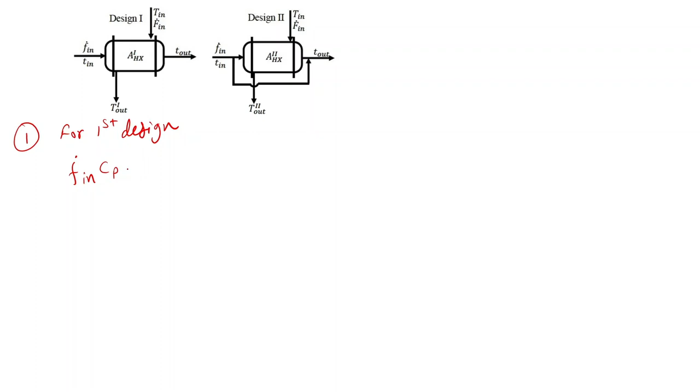So let's solve it. For design 1, let's write the energy balance. For the first design, we can write the energy balance as mCp delta T, where M is the mass flow rate, F dot in, and heat capacity as Cp. Let us consider this as tube side and this one as shell side. Corresponding to that, we can write this for the tube side fluid as Cpt, and the temperature difference is T out minus T in.

Similarly, for the shell side fluid, I can write it with T out given as 1. Now let's write this for the second design. Here the flow rate and the other parameters for both heat exchanger designs were given as constants, so I will just replace them as the same. The inlet and outlet temperatures T in and T out are same as the previous one. But in this case, the T out we have been given as T out 2, whereas in the earlier case it was T out 1.

So we have been given that all of these parameters are same in the first and second design. So all of this can be cancelled out, and we can see that these terms are the only different ones, so they must be equal. That is, we can write T1 out is equal to T2 out. Now from the given options, we have option B and option D, in which T1 out is equal to T2 out. Now we need to compare the area of the heat exchanger for both of these cases.

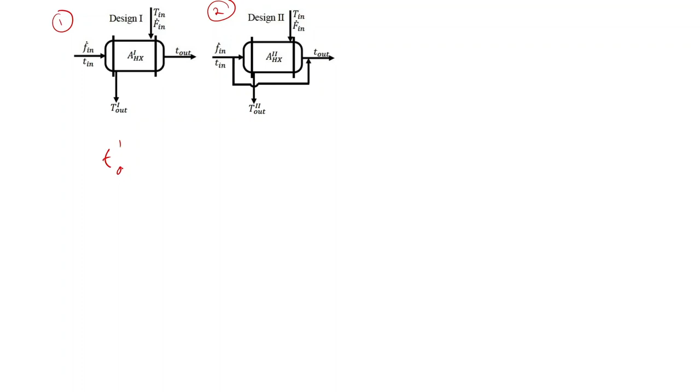So from that we can write that T1 out will be greater than T2 out. Ideally this should have been the case, that T1 out should have been greater than T2 out, but from the diagram we can see that both the temperatures are same.

So for design 2, we need to produce this higher T out. To produce higher T out, we need to increase the area of heat exchange. If the area of heat exchange is higher, then this T output will be higher, and that will ultimately be compensated by mixing it with this inlet stream.

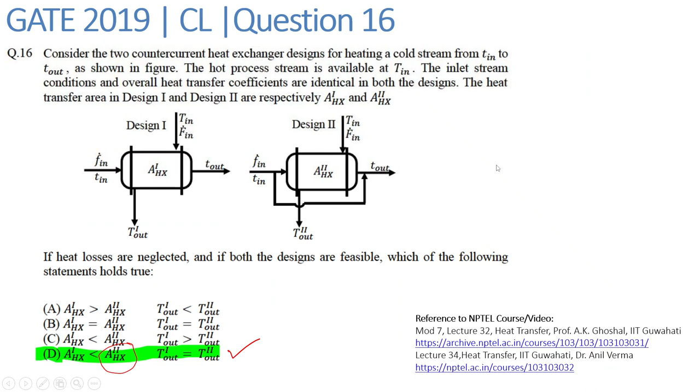So let's move on to the second question. This is question number 42 from GATE 2019 chemical engineering paper, from the subject of heat transfer.

In this question: a solid sphere of radius 1 centimeter and initial temperature of 25 degrees Celsius is exposed to a gas stream at 100 degrees Celsius. For the solid sphere, the density is 10 raised to 4 kg per meter cube and the specific heat is 500 joule per kg Kelvin. The density of gas is 0.6 kg per meter cube and its specific heat capacity is 10 raised to 3 joule per kg Kelvin. The solid sphere is approximated as a lumped system and all specific heats are constant. If the heat transfer coefficient between the solid and gas is 50 watt per meter square, the time in seconds needed for the sphere to reach 95 degrees Celsius is to be found.

This is from the topic of unsteady state heat transfer, which involves conduction within the solid sphere and convection outside the solid sphere, in this case due to the gas stream. This concept is found in lumped heat capacity analysis. So let's look at the video solution.

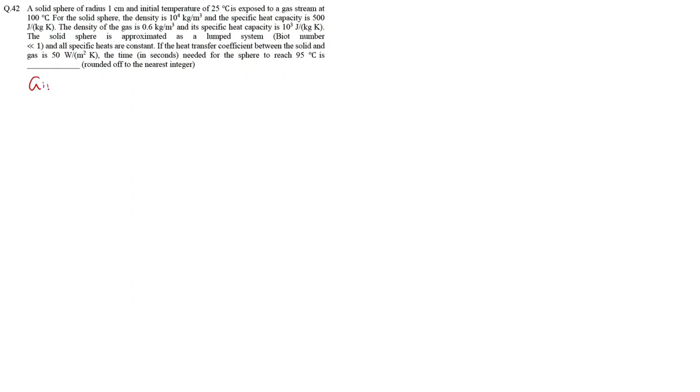Okay, so let's just write what all things we have been given. The radius of the sphere is 1 centimeter. The initial temperature, we will call it T0, is given as 25 degrees Celsius, and it is exposed to a gas stream at 100 degrees Celsius. So let's just call the ambient air as T infinity, which is 100 degrees Celsius.

For the solid sphere, the density is 10 raised to 4 kg per meter cube. Let's call it density of solid as rho s, equal to 10 raised to 4, and the specific heat capacity as 500. Similarly, the density of gas, let's call it density of fluid, as 0.6 kg per meter cube, and specific heat of fluid as 10 raised to 3 joule per kg Kelvin.

Now Biot number is very less than 1, so this implies that lumped heat capacity is applicable. The specific heats are constant, and the heat transfer coefficient H we have been given as 50 watt per meter square Kelvin, and at temperature equal to 95 degrees Celsius, time we have to find. So all these parameters have been given.

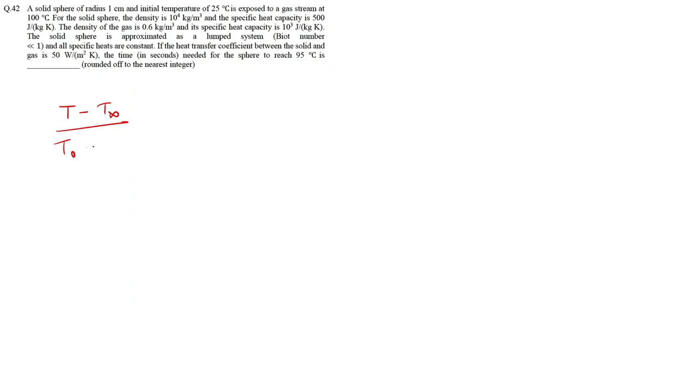Now let's just put this value here, and we will get t minus t infinity upon t naught minus t infinity is equal to exponential of minus 3 into 10 raised to minus 3 into t.

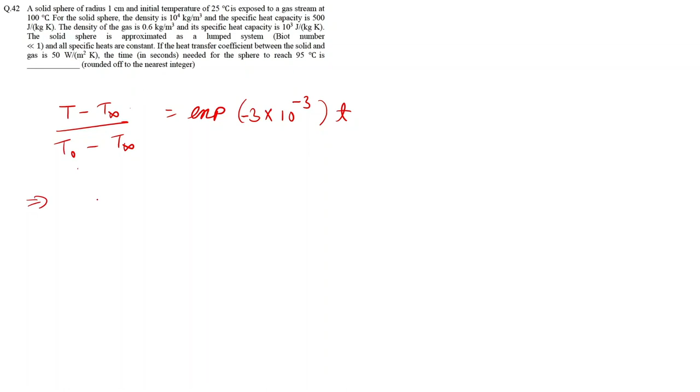Now let's just replace the value of t naught and t infinity. We have to find the time taken by the sphere to reach the temperature of 95 degrees Celsius, so this will be 95. So let's replace it: 95 minus T infinity, which was 100, upon T naught, the initial temperature, that is 25, minus 100. So this will be equal to exponential of minus of 3 into 10 raised to minus 3 into T.

So this we can write it as 5 on 75 is equal to exponential of... we can take log on both the sides, and that will give us ln of 1 by 15 is equal to minus of 3 into 10 raised to minus 3 into t.

So we can solve this equation, and we can get it as minus 2.708 is equal to minus of 3 into 10 raised to minus 3 into t, and that will give us time as 902.67 seconds. So yes, the time taken by the sphere to reach temperature of 95 degrees Celsius will be 902 seconds.

So yes, the final answer is 902.67 seconds, and since we have to round up till the nearest integer, we can round it as 903 seconds as the final answer.

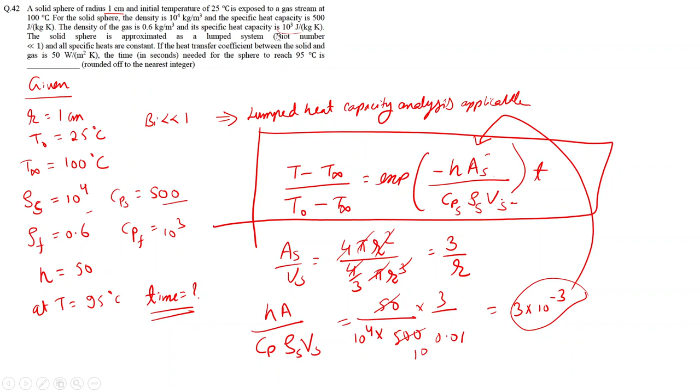And this formula will only be applicable if the Biot number is very less than 1. So if this condition is not given, then this formula shouldn't be applicable. That is, lumped heat capacity won't be applicable if Biot number is not very less than 1.

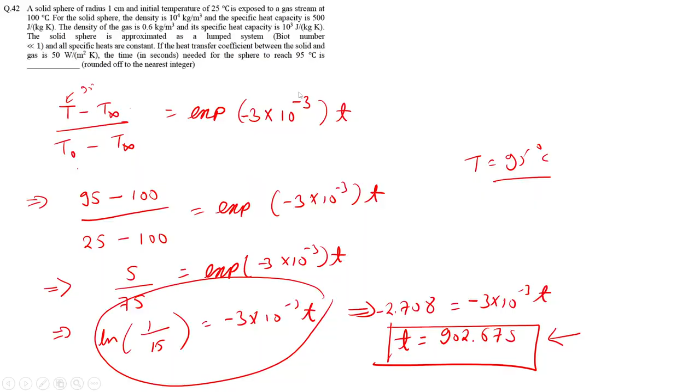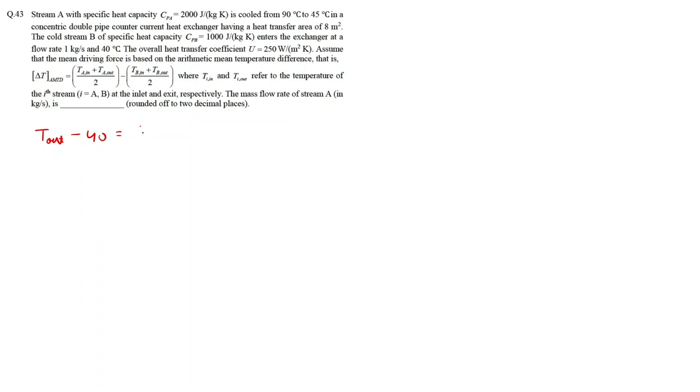So we can solve this and we will get T out minus 40 is equal to 2 into 67.5 minus 40 plus T out, right?

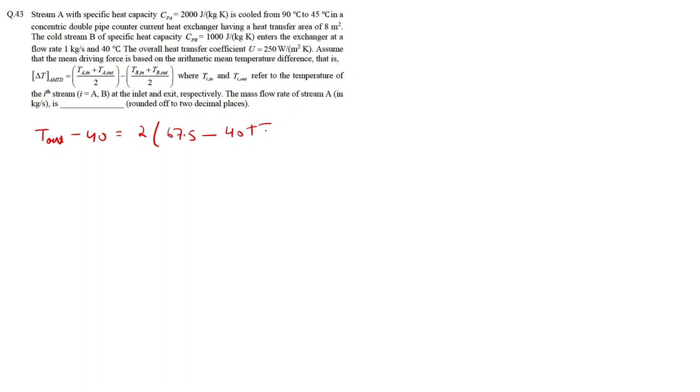T out will be equal to 40 plus 2 into 67.5 which was 135, minus of 40 minus of T out. This term will get cancelled and it will come to 2 T out is equal to 135. So this T out will become 67.5 degrees Celsius.

So from here we can replace the values. So that is mass flow rate was 1 into 1000 into T out minus 40. M dot C we have to find, CPC for the cold fluid, CPC is given as 2000, into temperature is changing from 90 to 45.

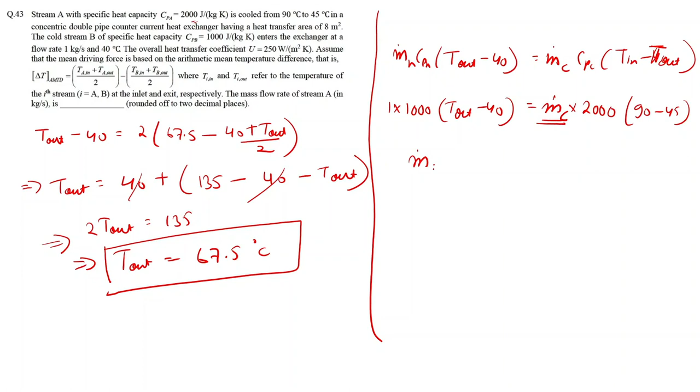M dot A will become 1000 into 67.5 minus 40 upon 2000 into 45. So yes, we can solve this and the final answer will become 0.3055 kg per second.

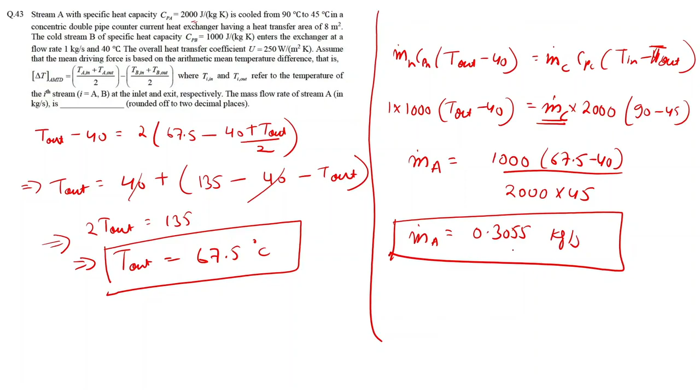So yes, the mass flow rate of stream A is given by 0.3055 kg per second. And we have been asked to round up till 2 decimal places, so we can report the final answer as 0.31 kg per second.

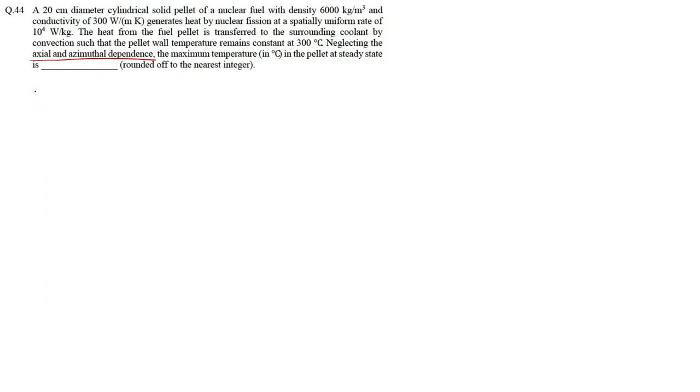That means that in the energy balance equation that we write for the cylinder, all the terms corresponding to z and phi will be equal to 0. So we can write the energy balance across the cylinder.

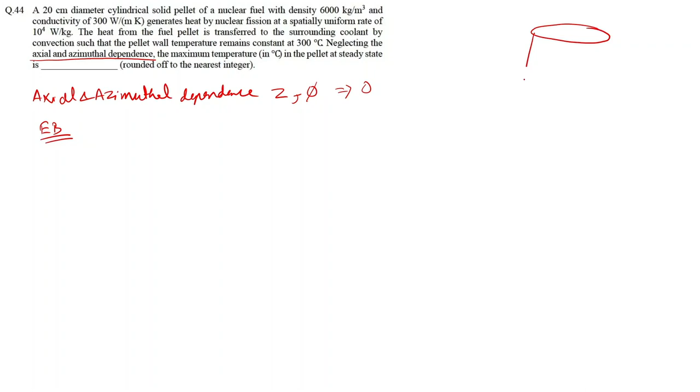So let's just consider this cylinder. This is my center, and we have been given r over here. So this is at r equal to 0, and this is r equal to R. This is my z.

So we can write the energy balance equation as 1 by r, d by dr of r, dT by dr, plus we also have this heat generation term, that is q dot, is equal to 0. So this energy balance we have to use to find the maximum temperature in the pellet.

But since we are given steady state, del T by del t we are considering as 0. And here, what all things have we been given? The diameter is 20 centimeter, that implies R is 0.1 meter.

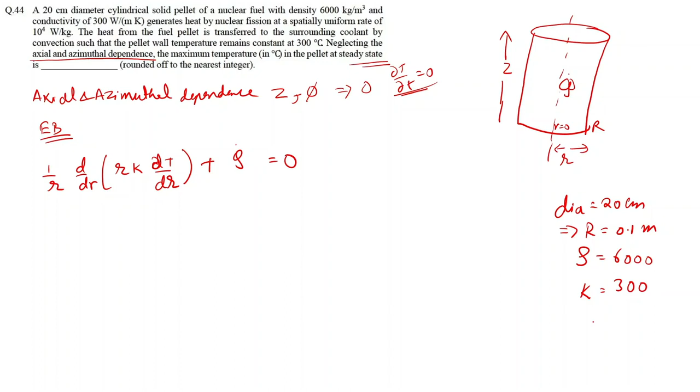Density we have been given as 6000. Conductivity K is 300. Now q dot we have been given as 10 raised to 4 watt per kg. And the pellet wall temperature we have been given as 300 degrees Celsius. And we have to find T max.

So let's just solve this equation to find the temperature profile. And once we have the temperature profile, then we can differentiate it with respect to r and equate that equation to 0 to find the maximum temperature.

We can simplify this and write it as d by dr of r k dT/dr plus q dot into r is equal to 0. Now we can integrate this equation with respect to r once, and it will give us r k dT/dr plus q dot, where the integration of r will be r square by 2. This will be equal to c1.

Now let's just find the value of c1. So that is, at r equal to 0, that is at the center, we can put the value of r equal to 0. So this will become 0 plus q dot into 0 is equal to c1. So that implies c1 will be equal to 0.

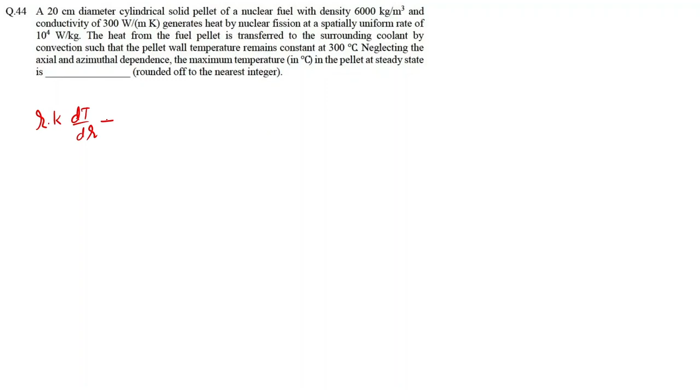So yes, we can write this as r k dT/dr plus q dot r square by 2 is equal to c1, and c1 was 0. Now we can again simplify this, and this r will get cancelled out, that is dT/dr is equal to minus of q dot r upon 2k.

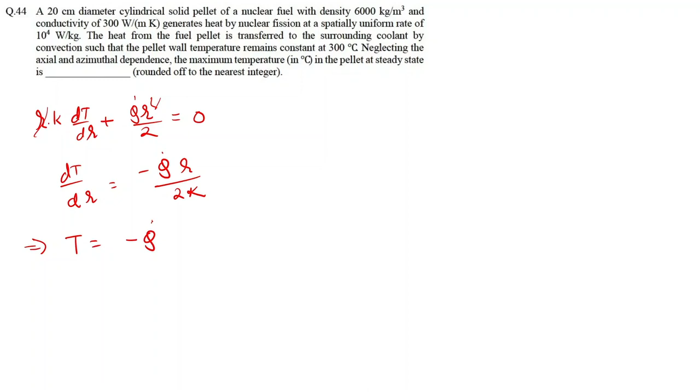We can again integrate this equation with respect to r to find the temperature variation across radius. So that will give us T is equal to minus of q dot into r square on 4k plus c2. Now we can use another boundary condition, that is at r equal to capital R, that is at the radius, we have been given the wall temperature as Tw.

So we can write that as Tw is equal to minus of q dot R square upon 4k plus c2. So from this we can find the value of c2 and put it over here, and we can get the temperature profile as T is equal to Tw minus of q dot r square upon 4k plus q dot R square upon 4k. This we can simplify and write it as...

So from this equation we have the temperature profile across radius. Now for maximum temperature we can write that dT/dr is equal to 0. So we can just differentiate this equation and equate it to 0, and we can get r equal to 0.

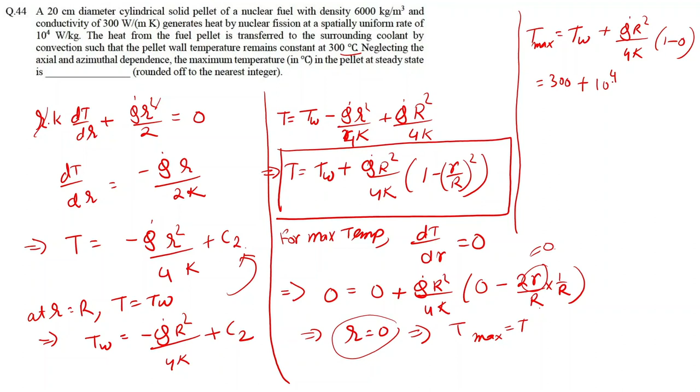Now this I need to change into suitable units, so I will multiply it by the density, 10 raised to 4 into 6000, on 4 into k. K we have been given as 300, into radius we have been given as 10. Diameter is 20 centimeters, so radius will be 0.1 meter, 0.1 whole square. This will be equal to 300 plus.

500, and T max will be 800 degrees Celsius. So yes, the maximum temperature in the pellet at steady state will be 800 degrees Celsius. With the final answer rounded up to the nearest integer, we write it as 800 degrees Celsius.

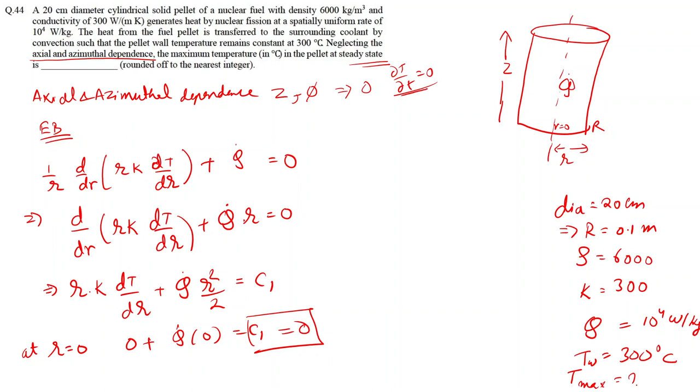Okay, so we looked at the last question for today's session, related to this cylindrical solid pellet, and we had to use the energy balance equations to find the maximum temperature within the cylindrical pellet. So given this axial and azimuthal dependence as 0, we used this equation and integrated it to find the temperature profile within the cylinder, then differentiated that to find the location for the maximum temperature, and then the maximum temperature within the cylinder was found by replacing the other values.

So in the final answer we had to write it. It was a numerical answer type question. We were asked to round up to the nearest integer, so we reported the answer as 800 degrees Celsius.

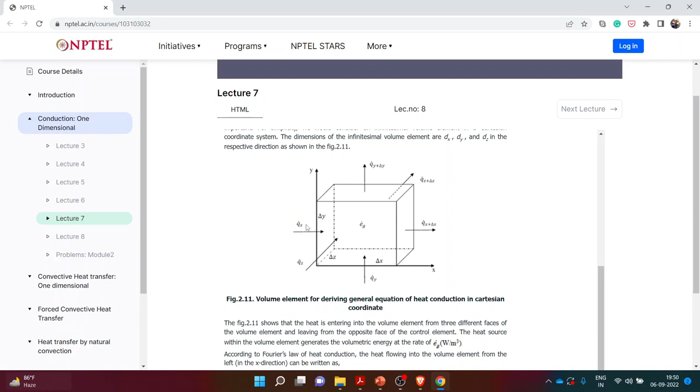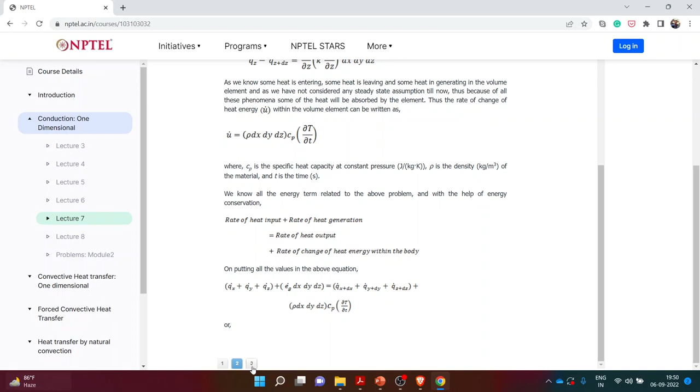So the same equation we can write in terms of cylindrical coordinates, and from that we get this final equation that we are using. So these are the notes corresponding to that lecture, and here we have been given the equations for this cuboid, or cube, whatever you consider.

These equations are in Cartesian coordinates x, y, and z. Similarly, we can find the equations for cylindrical coordinates, but that will be in terms of r, theta, and z. But in the given question, we were told that the variation across this axial and azimuthal dependence were 0, so del squared T upon del z squared, as well as del squared T upon del theta squared, will be equal to 0. And also this term we had equated to 0 since it was steady state. So from this equation, we get that.

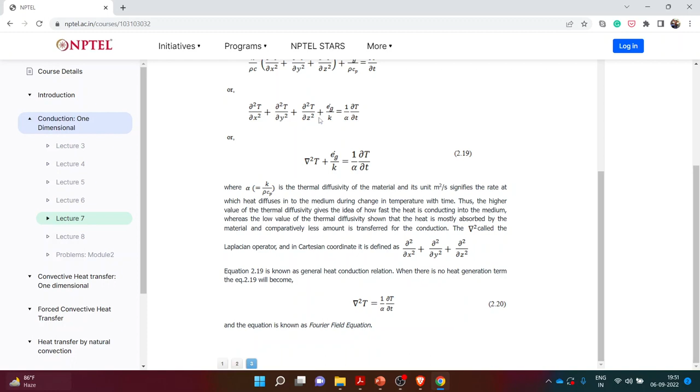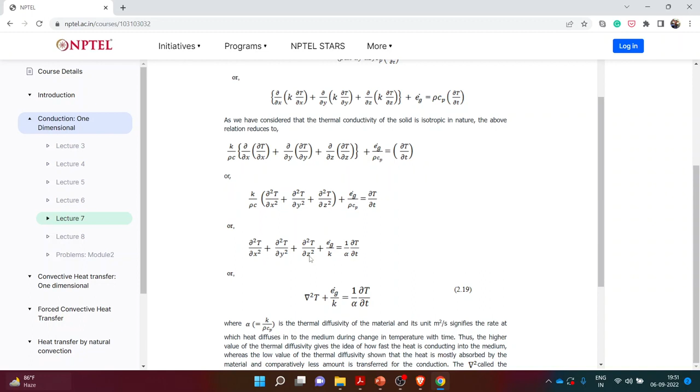Basically, this equation is in Cartesian coordinates, x, y, and z, and we have to use the cylindrical coordinates for our case. So in this equation also you can replace x equal to r sine theta, y equal to r cos theta, and then you can similarly get that cylindrical coordinate equation. Or in other references, you can find straight away this equation in cylindrical terms.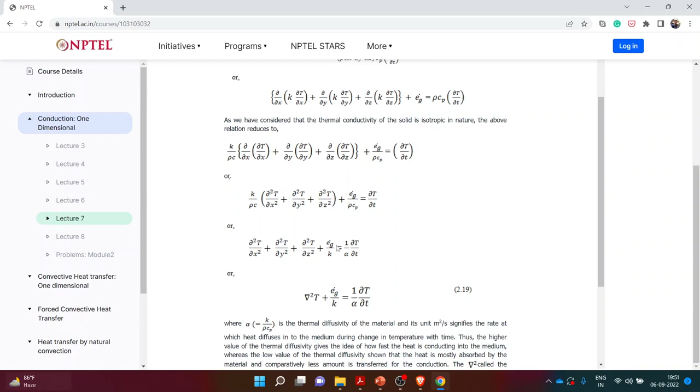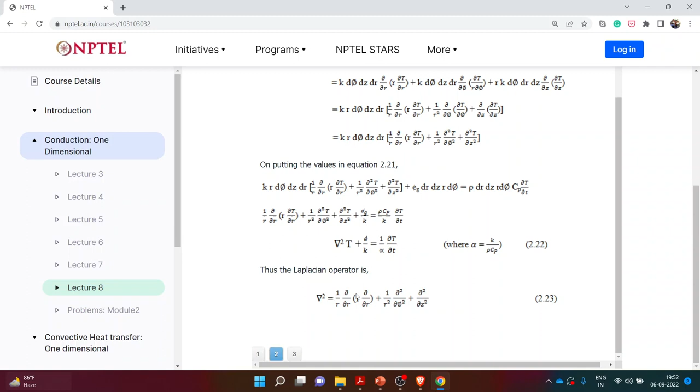So I don't know if it is visible or not, but in this lecture 8, they have derived this equation for the Laplacian operator. So we had used this first term, and these last two terms were neglected in our case. So you can straight away use this formula. I guess that answers your question.